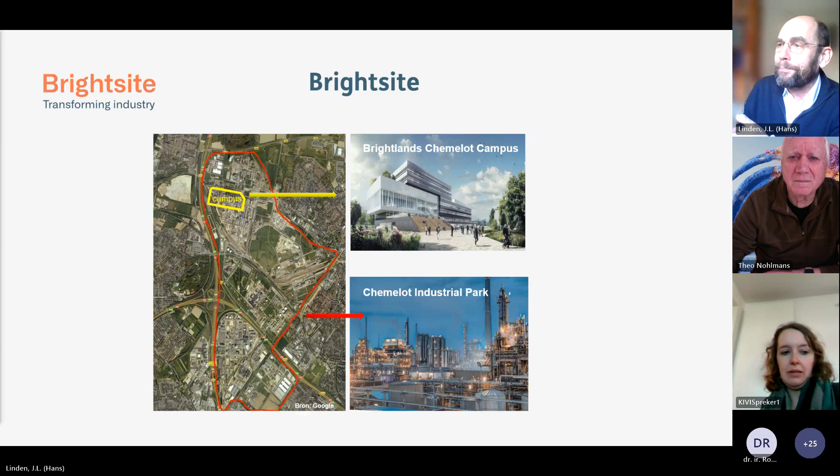But the chemical industry actually has quite a challenge. They have to meet the climate goals of 2030 and 2050, and for this, new processes are necessary. Of course, a lot of that is already being done, and we try to help them with this. And it's not only for Chemelot - we are inspired by Chemelot, as we say, but we also work together with companies outside of Chemelot.

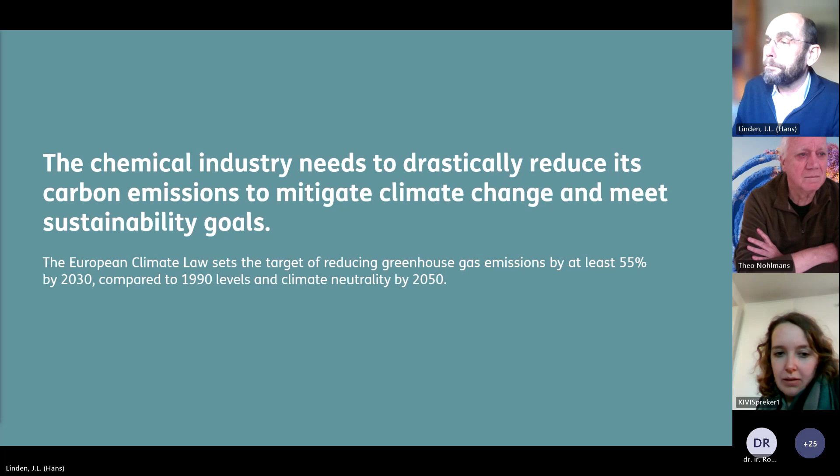So if you look at what has to be done in the chemical industry: the electrification, of course - we have to electrify what can be electrified. I come to that later, that's my second point. We have to maximize the energy generation without CO2 production, so wind, solar, maybe nuclear, at least so that we can avoid greenhouse gases going into the atmosphere.

Prioritize on energy efficiency, and what's also very important, look to alternative feedstock. In the future, we cannot use any fossils anymore. And how can we do that? That will be my first part of the presentation.

So actually, what we do also at Brightsite, we also do modeling. We calculate how to reach zero emission at 2050. We have a model where the different technologies can be chosen by the model, so that we can calculate how much CO2 reduction and CO2 emission can be realized.

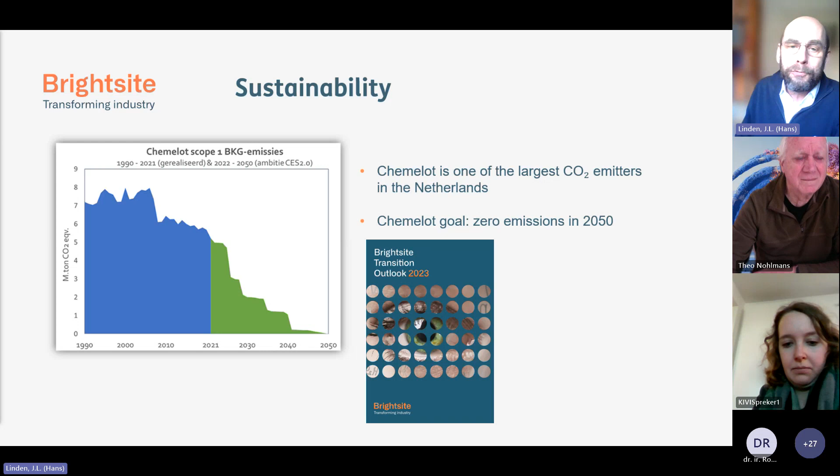So if you look at Chemelot at this moment - I give this as an example, but for the other chemical sites it's a little bit the same - at this moment, natural gas and naphtha come in, all via pipes. We have all the factories at Chemelot, and then we produce the fertilizers, the polymers, the other nitrogen-containing products, and we also make quite a bit of carbon dioxide.

Sorry to interrupt you, we have a short question from Arjan, and he's asking: how much of this progress is the result of stopping activities? That's not up to now - that was not because of stopping. That's because of the changes made by the companies on the site. It's not because of stopping.

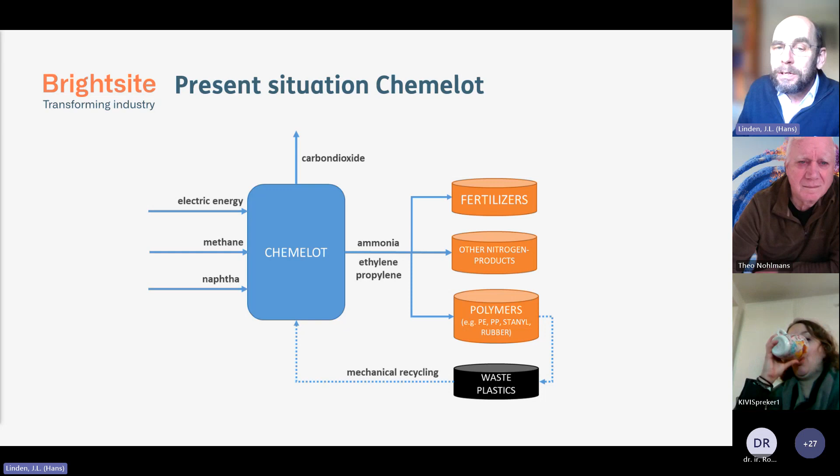Of course, there's a lot of debate about stopping, but I think we should not aim for that. Realize in Europe, 1 million people work in the chemical industry, and a lot of our income in the Netherlands also comes from the chemical industry. We should not throw that away. We should see how we can adapt the processes so that we comply with the climate goals, and still make the products we need. Everybody has several products in his house which have their origin at Chemelot. So we should be careful with that - don't give it away.

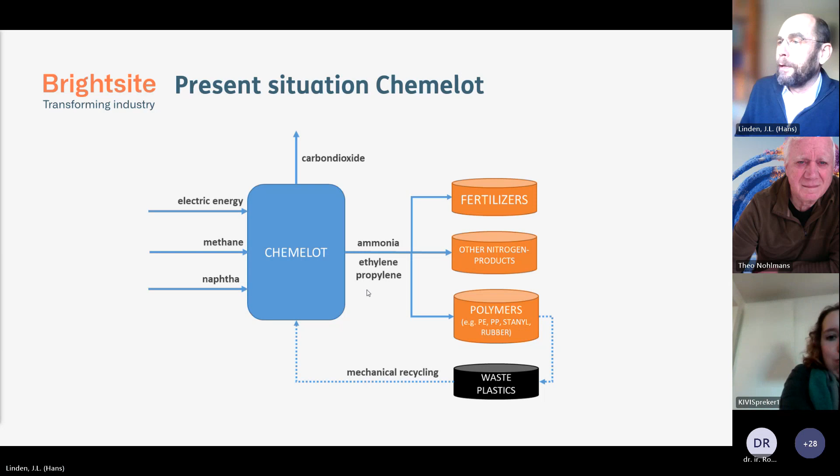So this is the situation at this moment, and this is how the situation can be in the future. There we start with renewable electricity. We have a different feedstock, which I will explain a little bit more about later on. We make the same products, and by mechanical and chemical recycling, we have one part of the feedstock.

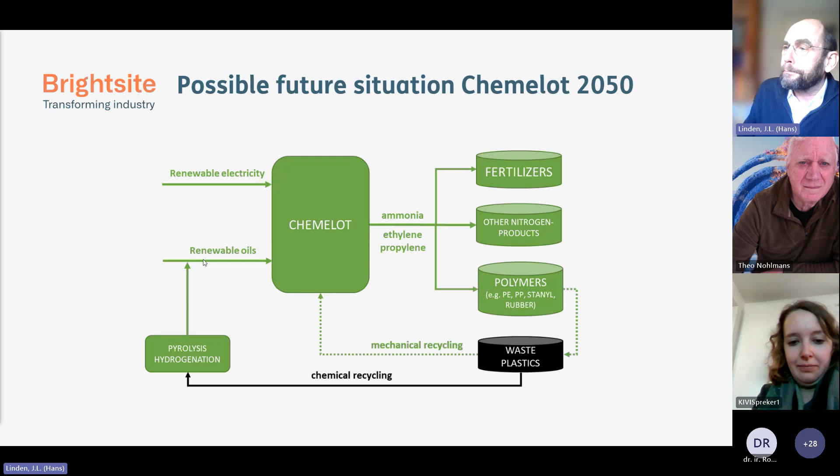And actually here you can see those. You can use sugar, for instance, from sugar beets, hydrogen made by electrolysis. You can use CO2 out of the air as a carbon source, and of course the recycling from plastic, and there you have the last carbon source. So for the carbon, we have three sources: natural resources, recycling, and CO2 from the air.

And hydrogen we can make with electrolysis. And then we can really go into a circular way. Why do I show this picture? With these three, plasma technology is also important. I'll show you how we can make hydrogen using a plasma, how we can do plastic recycling using a plasma, and how we can go from CO2 to new feedstock for the chemical industry.

So we have to stop using fossils in the future and look to different resources, like the sugar beets, like the CO2 from the air, like the hydrogen from water, and of course recycling. And that's how we also at the end get to a circular system.

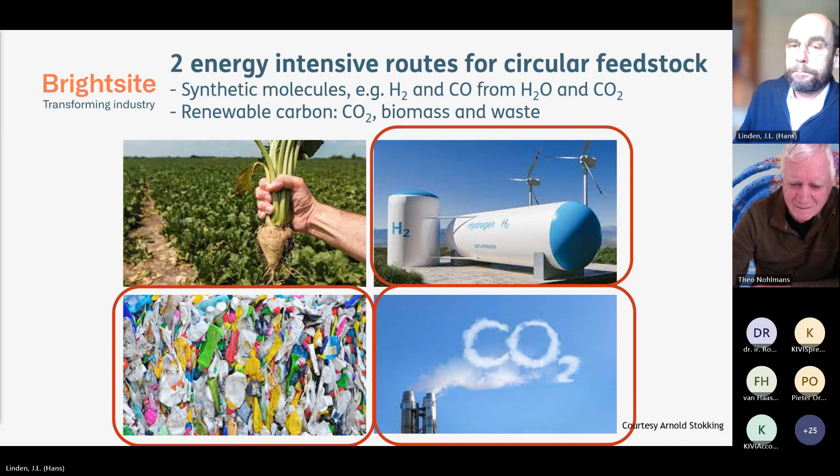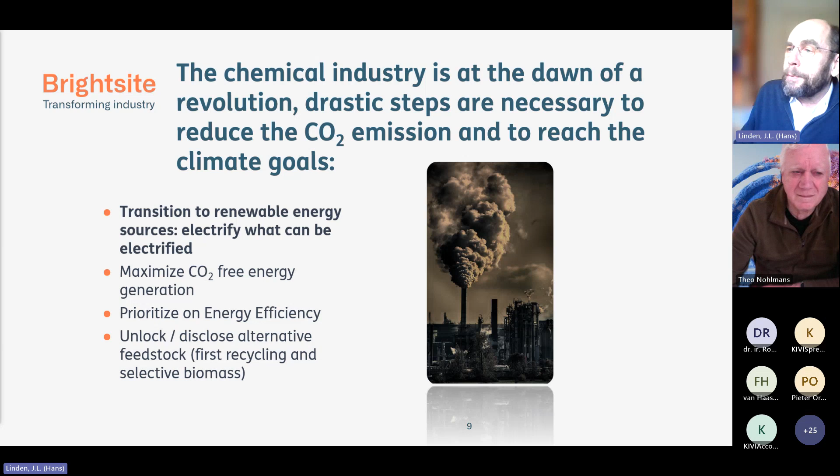This brings me to the second part, and this is about electrification, and that's where we use plasma. We think with plasma we can really have a game changer. It's actually an old technology which I will show now.

First, a little bit, what is a plasma? Actually, everybody knows a plasma. If you have lightning, it is also a plasma. It's a discharge. And then you also know that in this discharge, there's a lot of energy. And this is the energy we are using to drive reactions.

You see that especially when you have chemical reactions which normally need a lot of energy, endothermic reactions, then there you can make the difference with a bit of plasma. There are also already applications used in industry, for instance, for welding, plasma welding.

There are different coatings on top of each other, and these coatings reflect the infrared light, but they are still transparent. So your light comes into the house, but your heat stays out in the summer, or you keep the heat out in the summer, and in the winter you keep the heat inside. Another application is neon lighting, also plasma. So actually, plasma is already being used on a large scale.

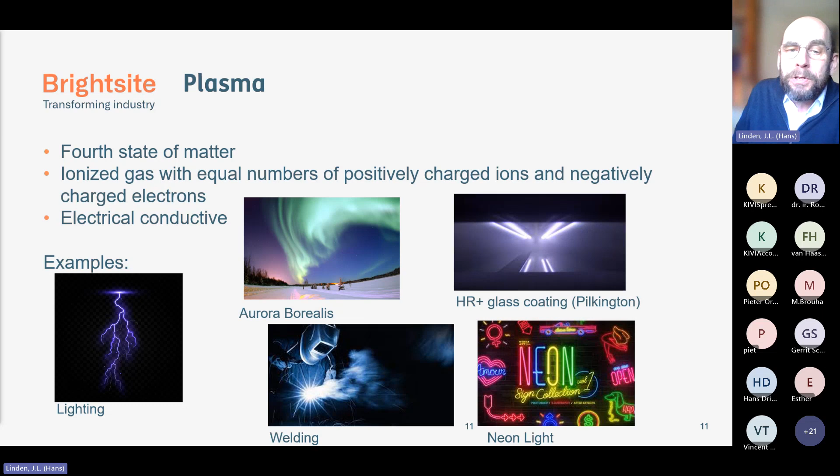One of the molecules we look at is methane. And actually, they have been looking at methane already for a very long time. Why do we want to look at methane?

If you look to the chemical industry, where the greenhouse gases come from, you have the ammonia plants. In the ammonia plants, methane goes in, hydrogen is produced. From hydrogen you make ammonia, from ammonia you go to the fertilizers. So that's a pretty important step. But for the production of this hydrogen, to make the ammonia and the fertilizer, for each ton of hydrogen you produce, you also produce 9 tons of CO2. So there's a huge amount of CO2 being formed.

Another large part of the chemical industry are the naphtha crackers. For each ton of olefin, the basis for many plastics, you also produce 1 ton of CO2. And with methane and a plasma, we can find a solution for both of those CO2 emitters.

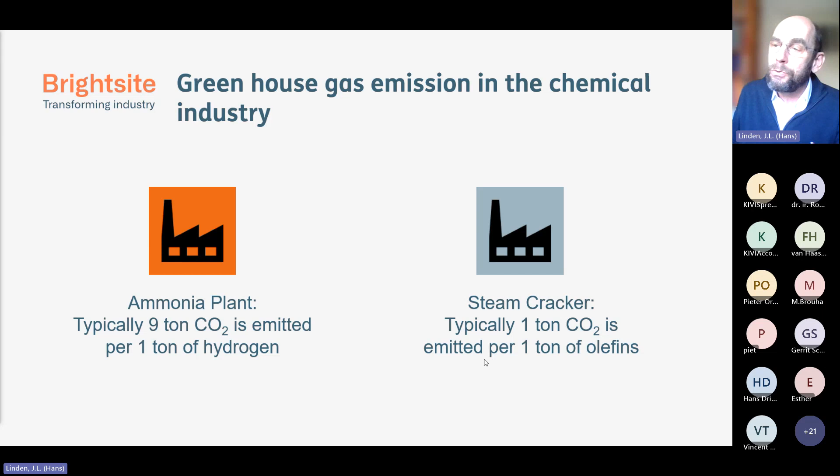So on the right side, you have a naphtha cracker. At this moment, the naphtha goes in. In the future, that will be replaced by bio-naphtha or pyrolysis oil, and in the future it will be driven by electricity. At this moment, they are heated with natural gas and by methane being formed in the naphtha cracker. But there are big programs in the world to electrify those naphtha crackers.

15% of the naphtha becomes methane, and at this moment this is burned directly to heat the cracker. If you electrify the cracker, this methane is a waste product. That's exactly the waste product we want to use. Put it in the plasma. Then you can make acetylene or ethylene, and this can go back to the naphtha cracker. You can also make hydrogen, which can go to the ammonia factory to produce fertilizers. Then on both factories, you do not have any CO2 left.

We need extra natural gas, I forgot to put it in here, so that for the whole site, there's enough feedstock to produce the fertilizers and the plastics, but there's no CO2 emission.

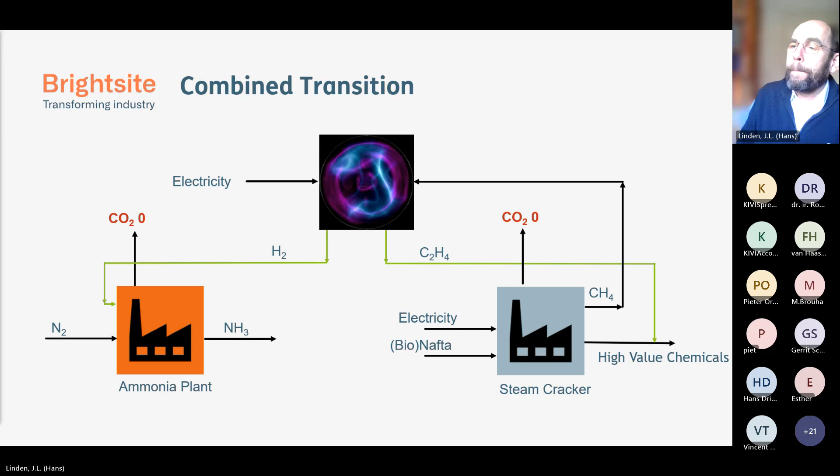With plasma, this is an efficient way to start from methane and go to hydrogen, acetylene, and ethylene. Acetylene is the basis to make ethylene, but via hydrogenation you can go to ethylene. From acetylene you can also make, for instance, PVC, and you can also make benzene. So acetylene is a building block for the chemical industry.

With this plasma, we do not have any scope 1 CO2 emission. It is an old technology, based on the Hüls process - I'll come to that later. It was already developed in the 30s last century.

A plasma is an efficient way of heating because you heat the gas directly, not through a wall. So your heat is inside the plasma. The methane goes into the plasma, and there the reaction takes place. There's no heating from outside, it's all only from the inside.

It's also possible to switch it on and off very fast. When the plasma starts, within a second you have thousands of degrees inside the plasma. That makes it possible to go to intermittent operations, so at times when abundant green electricity is available, then you operate.

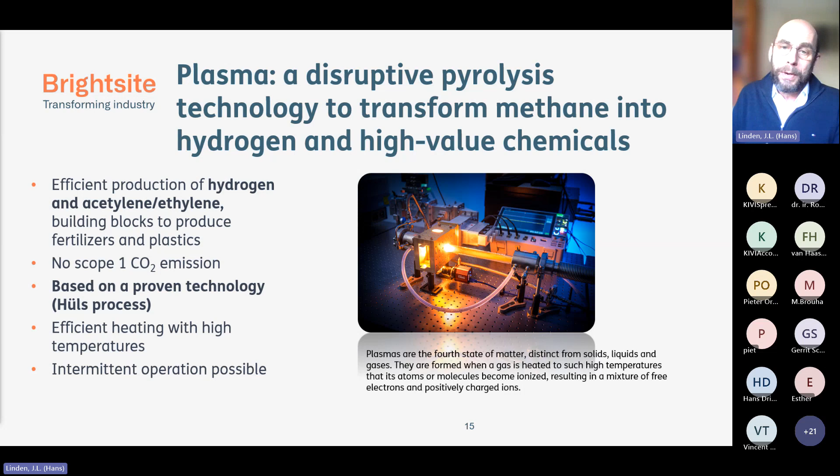Why do we want to use the plasma? Looking in a bit more detail with some chemical formulas, the top line is actually the steam methane reforming process being used in the chemical industry at this moment. To produce 1 kilogram of hydrogen to make ammonia and fertilizers, thermodynamically it takes 32 megajoules of energy, and next to the hydrogen you make 5.5 kilograms of CO2.

And of course you can do CCS. There are also big projects for this going on - ports in Rotterdam and also in Antwerp have big projects to take away the CO2 and put it in the ground.

Electrolysis to make hydrogen gets a lot of attention at the moment. It will become very important because we're going to need a lot of hydrogen in the future. But we have to realize it costs a lot of energy - compared to the steam methane reforming process, it takes 142 megajoules to produce 1 kilogram of hydrogen, and next to that you produce 8 kilograms of oxygen. Most of the time this oxygen just goes into the air, but it would be much better if you could also use the oxygen. For some applications, for instance in the steel industry, that really makes sense because they also need oxygen.

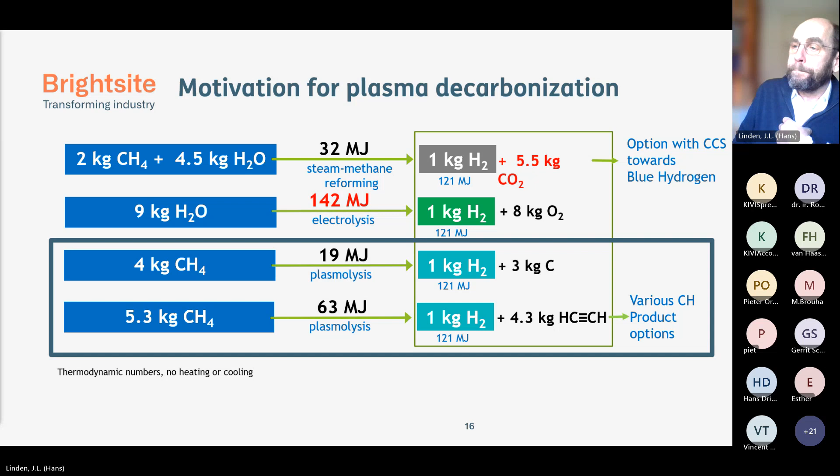I will come to that later about the carbon - one moment, it's my next slide actually. So to make hydrogen and acetylene starting from methane, it was developed in the 30s last century in Germany by the company Hüls. At that time in Germany, they developed that. You see here in the middle a picture of the plasma device itself, which has been used from 1939 until 1993.

It never became bigger because it was far more easy to burn natural gas than to further develop the plasma technology. That's why it was not used at more places. But it's very reliable because it's still functioning, and they already had quite big systems.

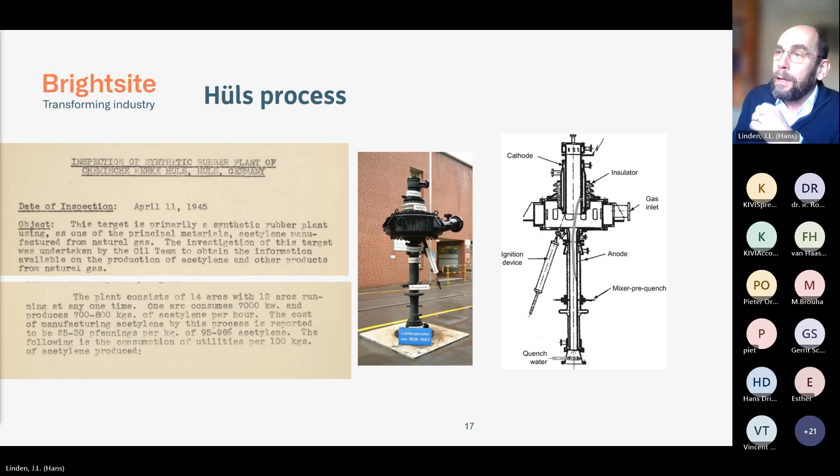So, old technology. Then coming to carbon, that's also already being used. If you make carbon and hydrogen, and you have a good grip on the process, you can make very good carbon black, and this carbon black can, for instance, be used in tires.

But we also have to realize that the carbon black market is limited. It's a 10 megaton annual market, and with one big chemical site, you could already produce enough carbon black for the whole world market. So the need for carbon black is not high enough.

That's why we want to aim at acetylene and ethylene, so that the carbon stays in the loop. If you only make a very low value carbon for landfill or something like that, then the carbon is out of the loop. It has to stay in the loop.

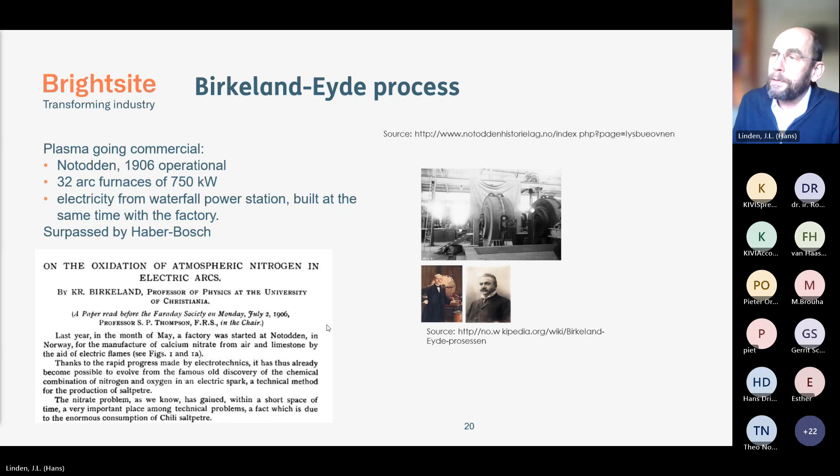The process was surpassed by the Haber-Bosch process, but now there's renewed attention for that. One example is Vital Fluid, a company in Eindhoven, scaling up, and they produce equipment to make NOx dissolved in water on a small scale.

Why do they want to build this equipment? This is for greenhouses, so they can make NOx dissolved in water as a fertilizer, which can directly be fed to the plants in the greenhouses. Then you don't need a big fertilizer factory; you can just make the fertilizer on demand, specific for these plants.

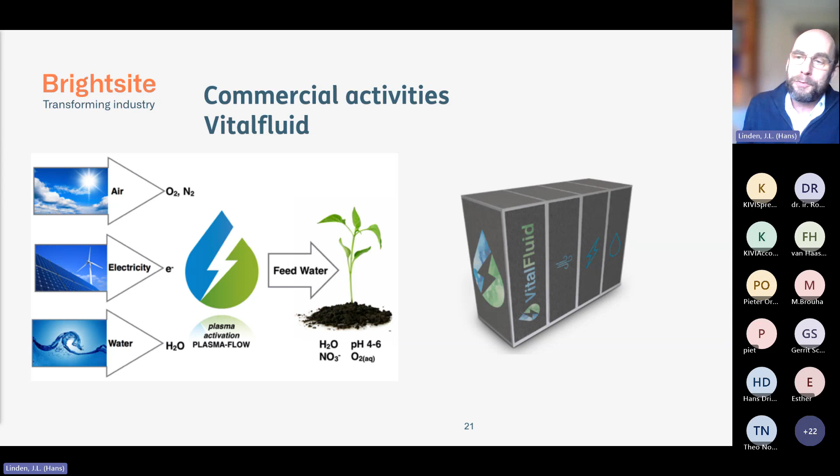Plastic waste, also already mentioned in the beginning. With the plasma, as I explained, you can reach very high temperatures and it heats up very fast. When you put plastic waste in a plasma, it heats up very fast to this very high temperature, meaning you end up in the top part of this overview.

It means that you make quite a big amount of gas compared to the oil and the char. And this gas is actually what we want, because we can use it again as a feedstock. We do not want to make char, as little as possible, and also oil is not that easy to handle. Gas is easier to handle, and that's why we can really make the difference using a plasma.

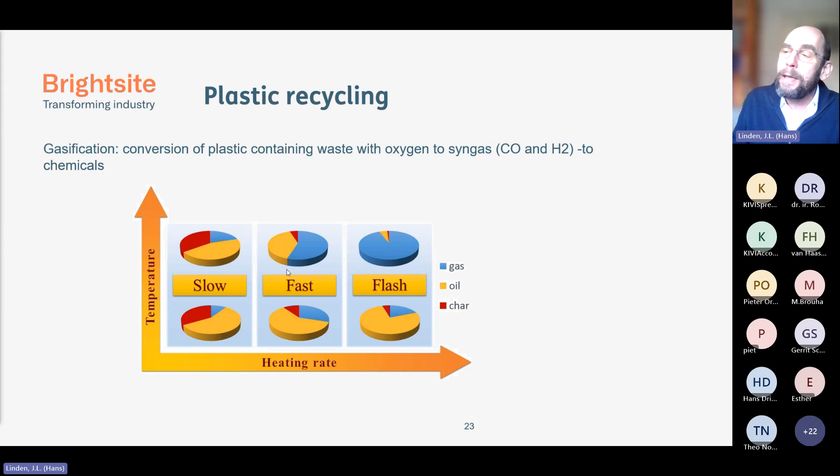Also, there are some companies starting up now. This is a company in the United States; they use a little bit different waste, but they make only hydrogen. I will not use that, but it's good to see that at least these technologies are being explored at this moment.

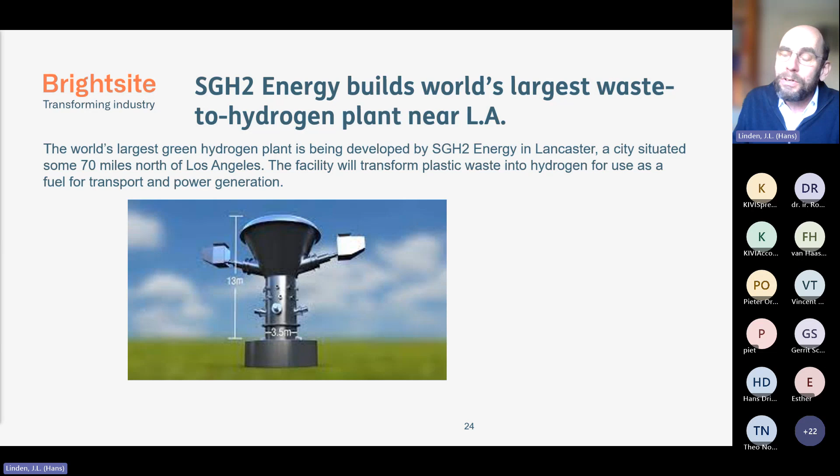And the fourth one, the last one, which I will explain, is CO2 utilization.

This has already been researched for quite some time, especially in Russia by Mr. Friedman. He's a very well-known professor on this topic. I spoke to him a few months ago.

He's already been working on this for a very long time. From CO2 you can make CO, and from CO you can, for instance, make methanol. There are several options. CO is again a feedstock to make several of the chemicals we need in the future.

And also there you see the first startups. This is a startup in Antwerp. They try to bring this to a larger scale.

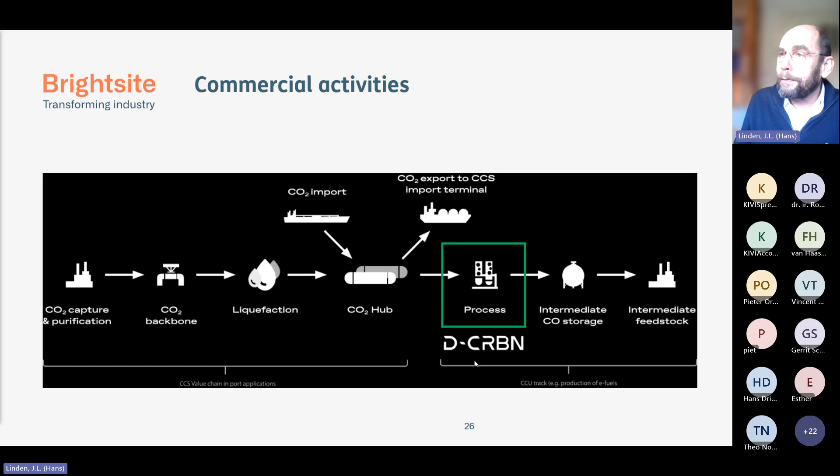Now, a little bit about what we are doing at Brightsite. We work together with those partners: Sitech, University of Maastricht, and TNO. Why do we want to do this with these three partners?

In this way, we can work on a very large TRL scale in parallel with each other. So we do the low TRL work, mainly at the University of Maastricht, really understanding the plasma, measuring on the plasma, seeing where what is being formed. We started with methane for these three, but more on that later.

The second part is the bench scale systems, TRL 4 to 5, bigger systems, and there we also use arcs besides the microwave which we use on the left side. Here you see a small picture of the plasma inside one of the plasma systems, and there we define much more the process as it can be used in industry.

The next steps go to TRL 6 to 7, where Sitech is much more in the lead, and in the middle TNO is more in the lead. There we want to go to 500 kilowatts to demonstrate it at a reasonable scale, a 24/7 scale, so that it can be transferred to industry. We will actually do this in a separate company, because quite some investment is needed to make this step.

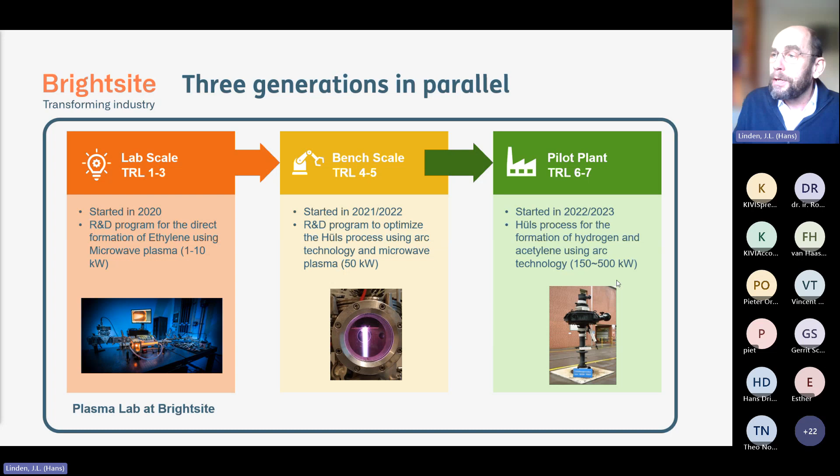So the lab scale experiments are running at this moment, and the bench scale experiments are running. We do all the engineering and things like that for the pilot plant already, and we hope to start building the pilot plant for methane valorization next year. So this will be operational in a short time now. This is what we call our plasma lab - these three steps. From there on, it can go to a demo phase and to large scale production.

A little bit also about the kinetics. If you put methane in a plasma, then you first make CH3. Two CH3 molecules couple to form ethane. From ethane it goes to ethylene. From ethylene it goes to acetylene. From acetylene it goes to carbon.

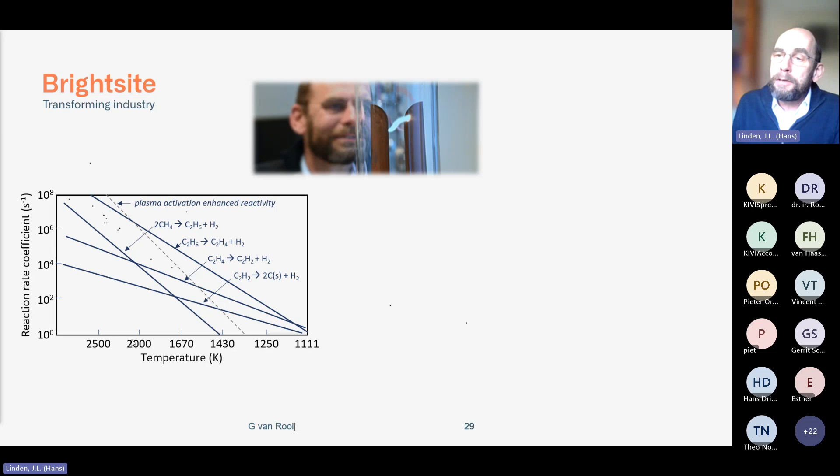To get this reaction going is not that difficult. But to stop the reaction in time, that's the challenge. Here on the x-axis you see the temperature, on the y-axis you see the reaction rate coefficient. When you leave the methane long enough in your plasma, you make carbon black and hydrogen.

Because we are using a plasma, we also think we have some non-equilibrium effects, meaning we have an enlarged process window. In the picture, you see an example of a plasma between two electrodes - it's a Jacob's ladder, but this arc goes up. If you want to visit us, we can show this.

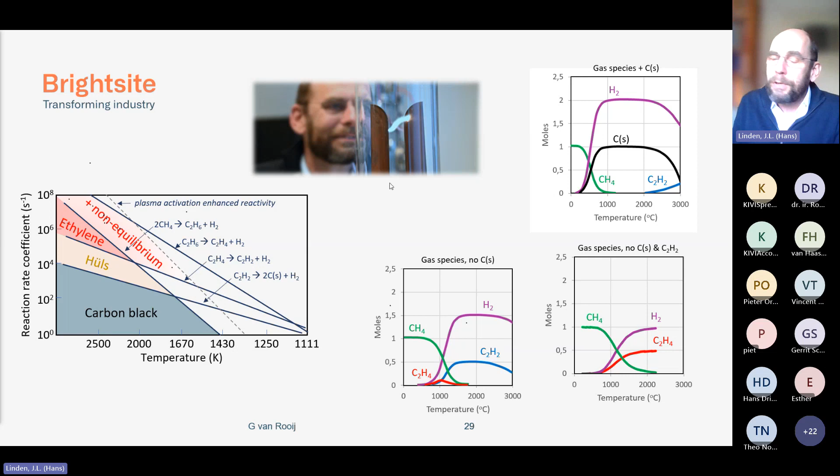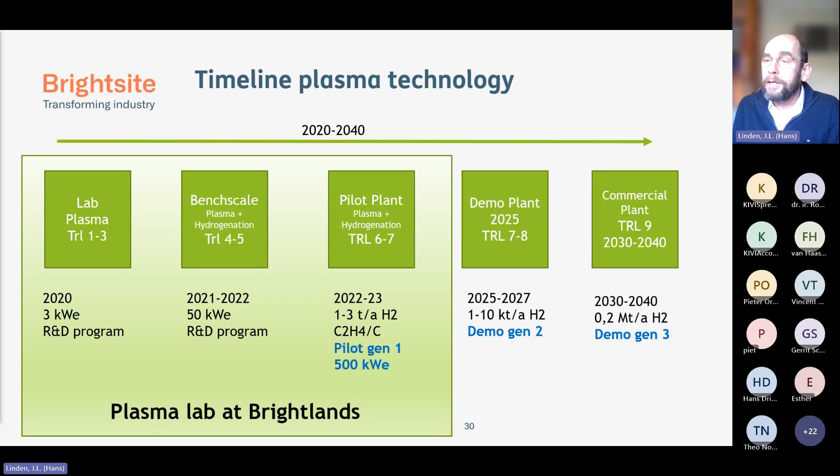One of the projects we have running, I'll mention separately. It's a NextGen project, one of the Groeifonds initiatives within the Netherlands. NextGen aims to develop the high-tech industry even further. We are very strong in the high-tech industry, so we develop equipment which can be used for several applications, also for plasma. There we work in a consortium with 14 partners, mainly out of the high-tech industry, next to a few end users of the chemical industry, to develop the equipment necessary for this.

In the chemical industry, the high-tech equipment was not used on a large scale, and here we bring those two industries together, the high-tech industry and the chemical industry, so that we also have the equipment for large-scale production available by the time the processes have been developed.

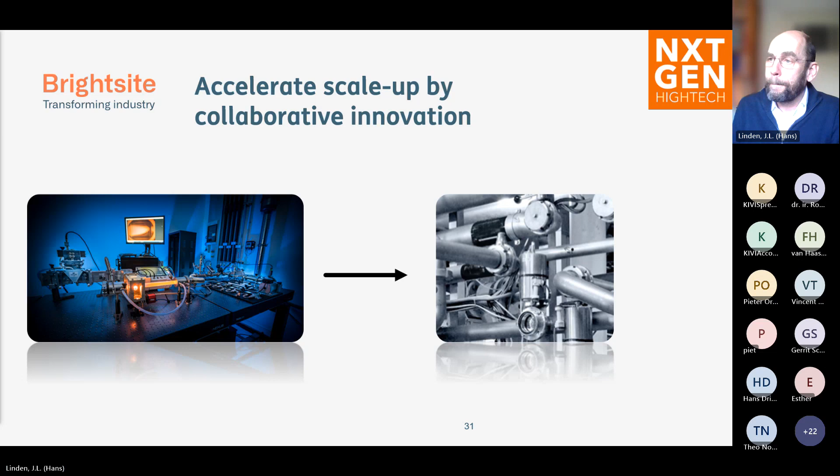We have another question from Arjan: does the pilot plant serve to bring the Hüls process further to make ethylene rather than acetylene? The pilot plant, we still aim at acetylene and hydrogen. With the knowledge from nowadays and the equipment available nowadays, we think we can do better than the factory which is already there. Actually, you cannot buy the Hüls process. Of course it's operational, but you can never buy it, nowhere. That's what we aim at.

We have another question from Vincent: how does the technology cost scale with capex, in a rather linear way? No, not linear, not fully. What we do in the NextGen high-tech project is define the unit size, the optimum unit size, and that will be placed next to each other, so it will be modular. As I showed with what was happening in Marl, they had 14 arcs or something like that. So we want to define which is the optimum. When you start putting them next to each other, then it becomes linear, but before that time, it's not linear.